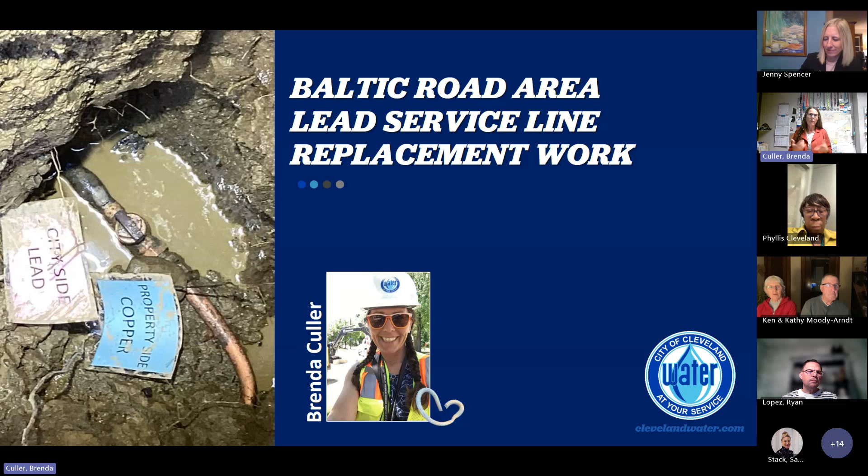Yes, fabulous. So, Baltic area lead service line replacement work: what you see on the screen here is what our contractors see when they're doing work in this street to identify service line material. I'll go through today's presentation kind of rapidly, but I'm open to any questions you might have at the end.

Cleveland Water meets all Safe Drinking Water Act requirements and has for more than 30 years. We just recently finished compliance sampling system-wide, and it shows our water remains well below the 15 parts per billion limit on lead.

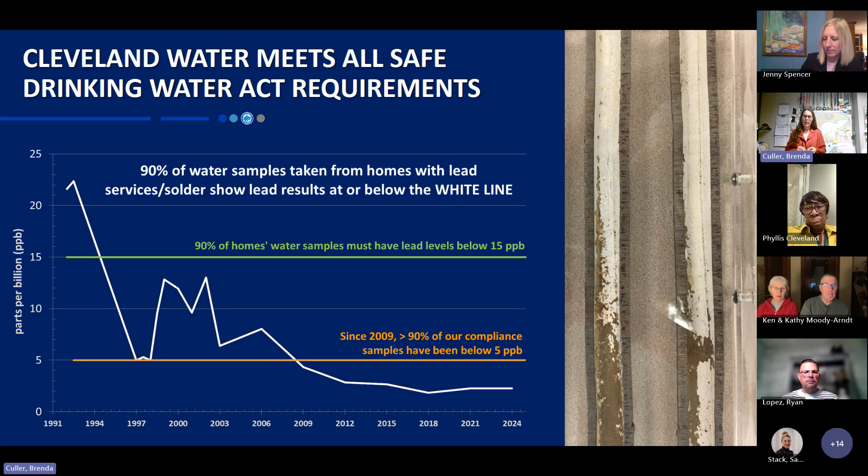So what we've been doing is Cleveland Water has been very proactive at trying to get bipartisan infrastructure legislation funding to take out lead service lines in communities that have the most lead service lines, such as the city of Cleveland. We started this work a couple years ago in terms of planning and obtaining the federal funding, which is a portion of loan and a portion of grant. We actually started replacement work in August of 2023.

In terms of service lines, we realized during the project that a lot of people are unfamiliar with water infrastructure. Water mains are below every single road in Cuyahoga County, and most of those water mains belong to the city of Cleveland Water. But a service line is what connects the water main beneath the street to your home.

The service line is divided into various types of material, and we are now required by federal law to investigate the material types, record this, and put it on public-facing maps. So the city-owned portion of the service line is marked A. We are investigating lead connections on your street because we think that is lead. The B portion is what comes into your house.

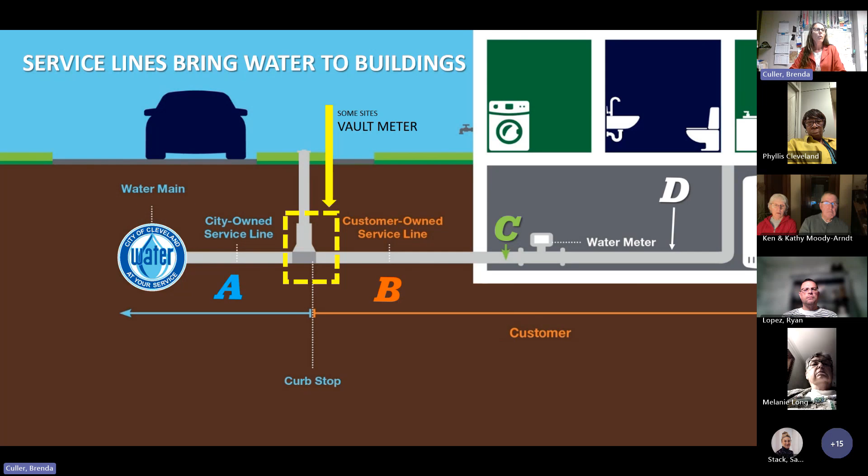You see this customer service line marked B when we do an investigation in the street, and C is what comes into your house before the water meter. Traditionally, about 99.9% of B and C are the same material, and most of that material is copper. Some customers do have a vault meter where the water meter is not in their house but vaults in the street. We address those individually, but in general, what we're trying to find is what's on either side of that curb stop connection so we can replace lead when it is found.

Where is the lead? These lead service lines could be on pre-1954 original water main installs, or on customers' homes that were built before 1954. Sometimes water mains were laid in the ground and connections on the city side were made many years, even decades, before the homes were constructed. That's why we don't always have similar material on either side of the connection.

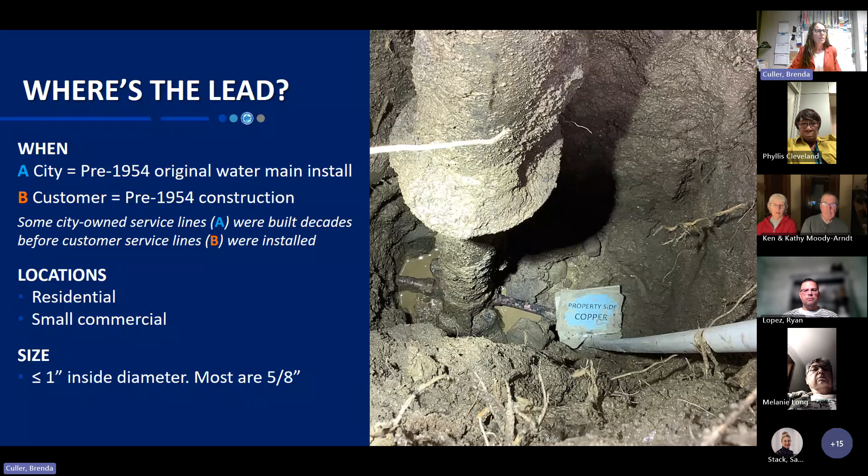Lead service lines were used primarily at residential connections and small commercial because the connection size is 1 inch or smaller. Cleveland has a lot of lead service lines, and we're working very hard to plan with city of Cleveland officials for their removal. Ward 15 in Cleveland, if it were its own city, would be in the top 20 communities that have the number of service lines.

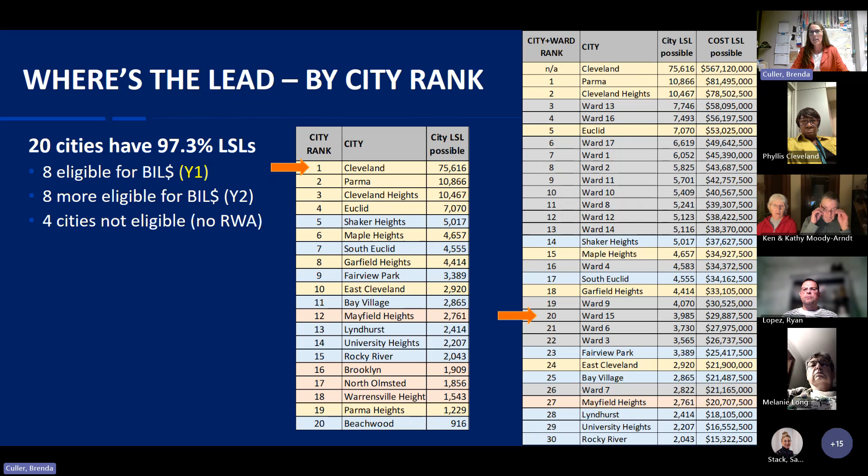So we're very excited that Councilwoman Spencer is supportive of our initiative to take out lead service lines in her ward. The map, which was on the flyer delivered to your home, is the one presented here on the screen. It outlines the lead service line replacement work area in red, with the water pollution control replacement work area marked by green dotted lines inside of that. In terms of the lead service line replacement work, there are approximately 125 connections in our work zone that could have lead on the city side.

Of those connections, about 80% of the investigations are complete and we know what the material is, and about 50% of the work to replace lead is complete at this time. It'll probably be another 3 to 4 weeks before our work is wrapped up in terms of taking out the lead service lines. Later this evening, water pollution control staff will go over their portion of the work.

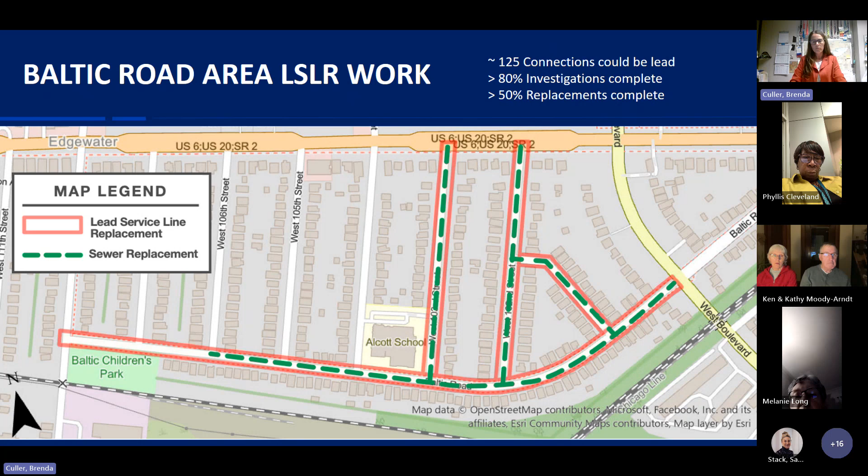In terms of materials you've seen or will see at your house, there are our welcome and outreach letters, which come after much planning and communication with you. If your lead service line has been removed, you've gotten a purple door notice like the one shown, with a check mark beside lead removed. You'll also get flushing instructions on how to remove and clean your aerators. These are part of our communications plan that our small lead team here at Cleveland Water will be implementing at every connection that is lead over the next 13 or so years.

These notices - if you have residents or friends who don't live in the Baltic area but could have a lead service line, they may have gotten a letter from Cleveland Water recently with a QR code inviting residents to scan it and report their service line material. This is something Cleveland Water needs and is encouraging residents to do. We have about 195,000 locations where we have to determine the material on the customer side, and that's presented on our new public facing map.

Because you're in the Baltic Road area, the work to replace your lead service lines overlapped with the mailing of this annual notice, so you may have received both pieces of literature in the mail. We apologize for any confusion.

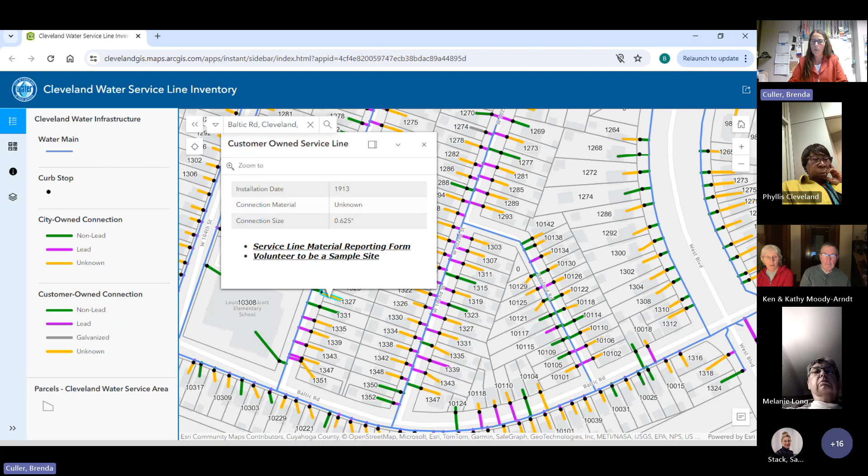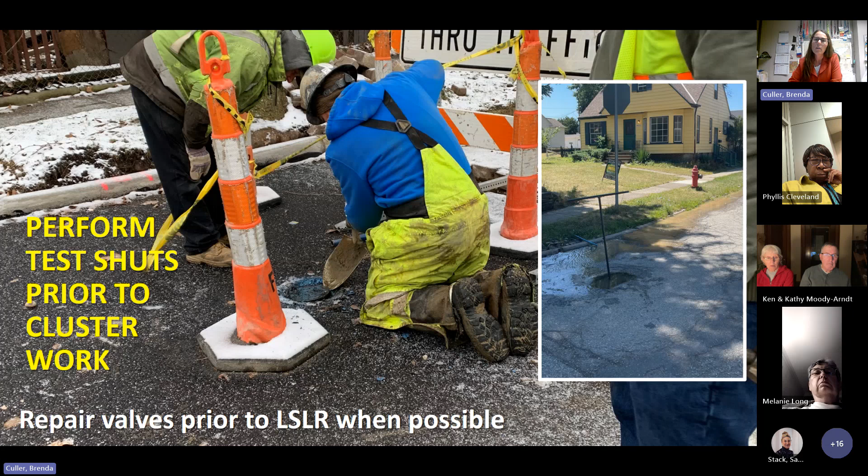The staff in this picture are the new lead service line field staff who were trained in August 2023, and many of these young new staffers are still on the job working. They're actually consultants, but we consider them part of the Cleveland Water family.

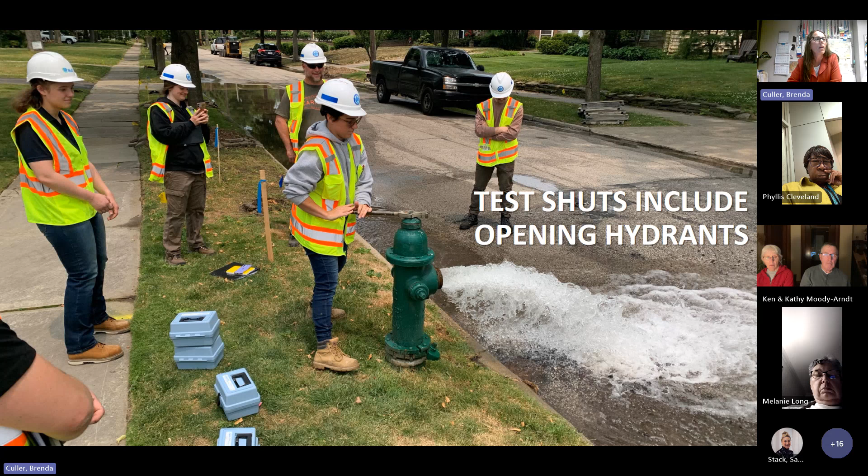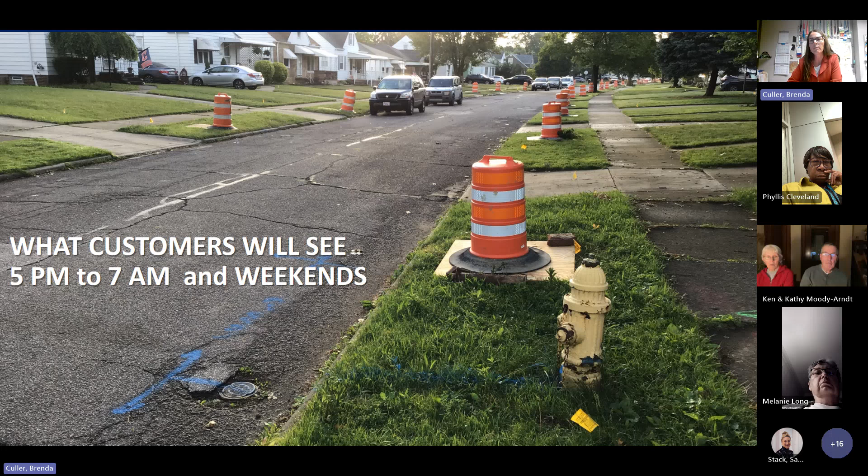What you'll see before and after construction hours, and on the weekends, is basically pieces of wood with orange barrels on top. These are the curb stop locations where the material will be investigated. Material is investigated with hydro excavation, which squirts water under pressure into the hole to remove the soil, and then a suction hose vacuums up the soil down to the depth of the service connection.

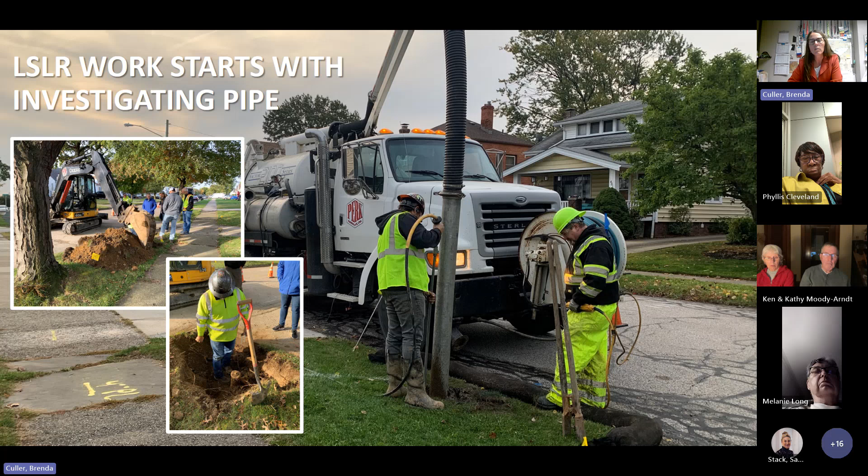The other way is using a backhoe to dig around the connection. If you have a concrete driveway where your curb stop is located, we do have to dig that up through the concrete - it takes a little longer.

What customers see during lead service line replacement depends on which contractor is assigned to the street. Terrace Construction is assigned to the Baltic Road neighborhood. The contractor on the screen is a different contractor, but there are lots of moving parts between dump trucks, backhoes, operators, and staff running around trying to get the job done efficiently.

Typical city-owned lead service line replacements have two excavations: one right adjacent to the curb above the water main - that's the one in the street - and one excavation in the tree lawn. These two connections will take out the city-owned lead. This is called a short side connection because it's closer to where the water main is. If you're on the opposite side of the street from the fire hydrants, you have a long side connection, but this same hole in the street will be used to replace your water service connection.

91% of customers in Cleveland have copper on the customer side, and we do not have to do work at your home. That pattern is pretty much holding true for the Baltic area neighborhood, where on Baltic Road itself, I think we only had 2 customers that had lead connections that needed replaced.

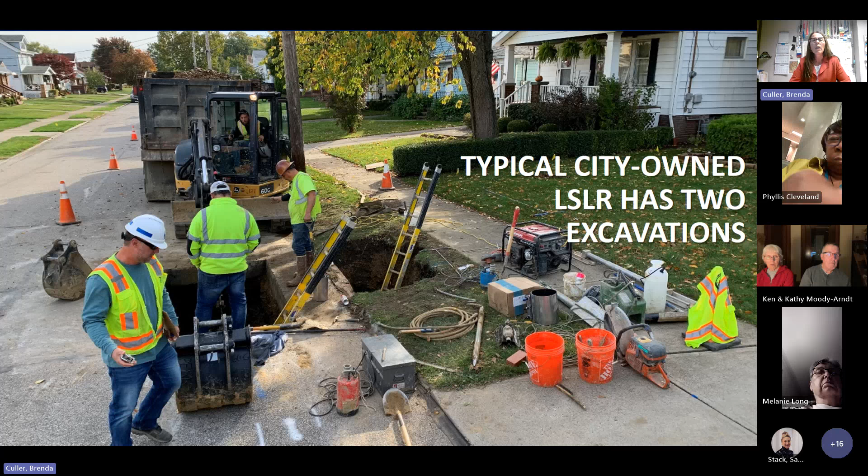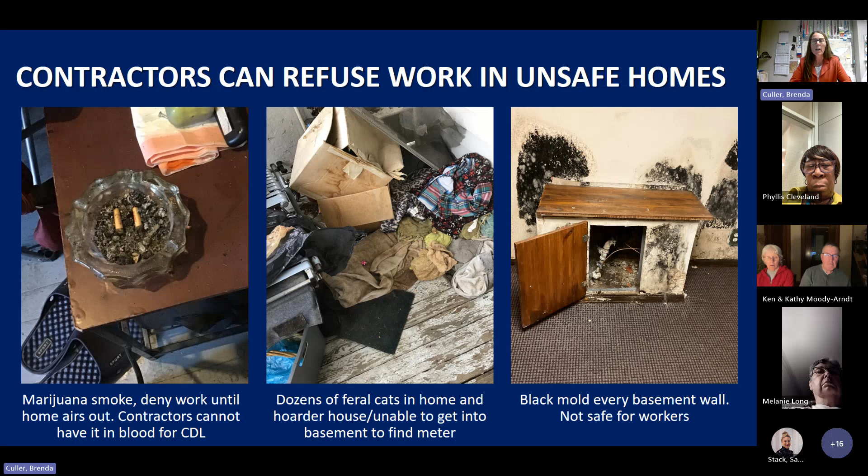As part of our program and as part of the federal requirement, customers who have galvanized steel downstream of a lead service line - we are also replacing those connections. Currently that's at no cost to Cleveland Water customers, and we hope to continue that pattern. If there is something in the customer's home that makes it unsafe for our contractors to do the work, we'll advise the customer of the thing that needs to be corrected, and then when they make that correction, we will replace the customer-owned lead service line at that time.

A question we often get is, how is this done and what's it going to look like? There are 3 different ways, and we always choose the least invasive way possible.

So one method is called moling. The drill bit on the left is used to cut about a 3.5-inch diameter hole right above the foundation wall. A mole is run through it out to the street, and then the copper connection is pulled from inside the house out to where the water main is at the curb stop, and that's connected.

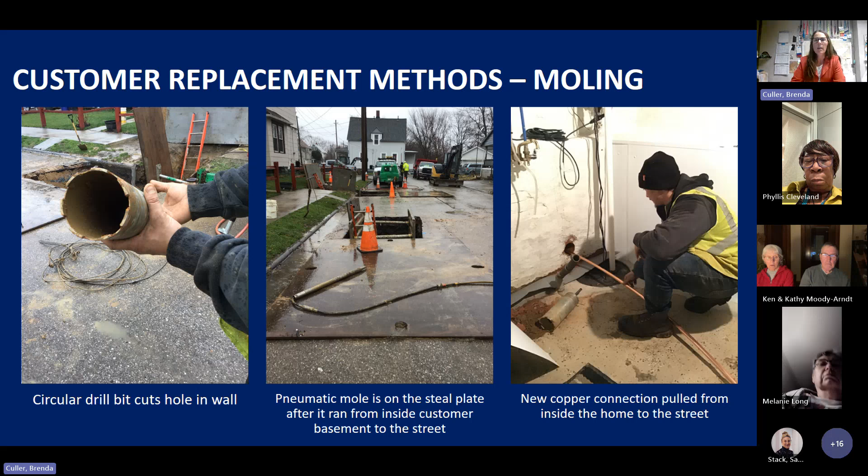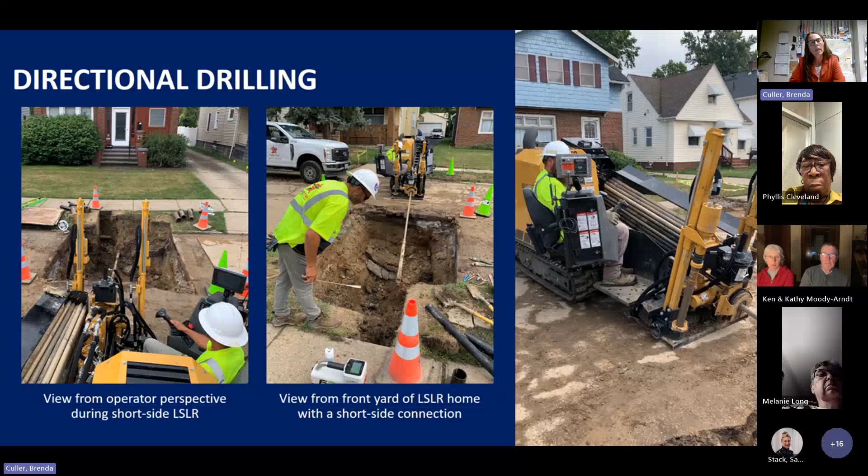Another method is called directional drilling. This method is not being used in your neighborhood, but some of your friends who live in Councilwoman Spencer's ward may experience this in coming years. This is a small machine that sits sideways across the road, and it literally drills a hole underground to run the new connection through. That drill bit will come up in the customer's basement. The advantage to this is sometimes if the water meter's not at the facing wall, we can go under the foundation and not have to move the meter.

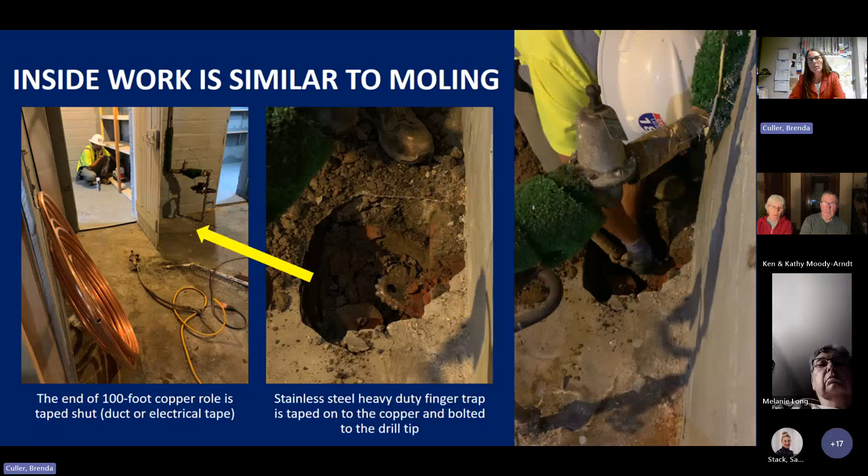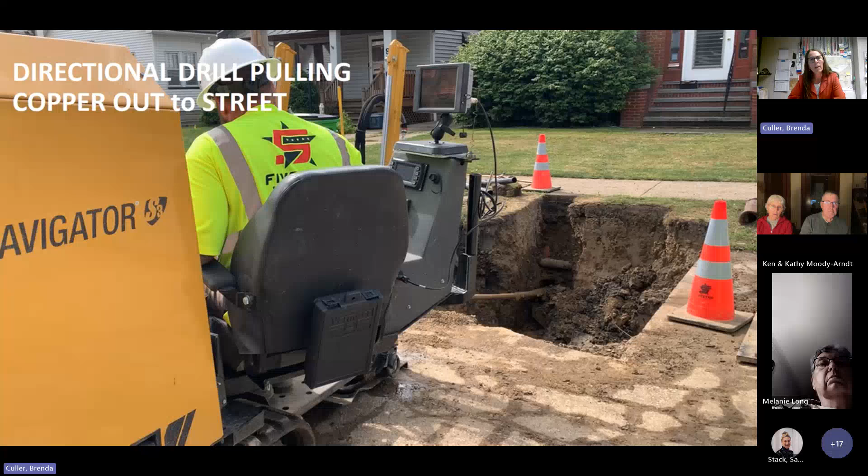But if we do have to move the meter, we will reconnect all the customer's plumbing, and that's work our contractors will do at no direct cost to the customers. This copper line is then pulled out through the ground, underneath the ground, without disturbing most of the tree lawn soil, as you can see in this video. That's the copper line being pulled through the ground. The copper is kept safe inside because the ends are taped shut.

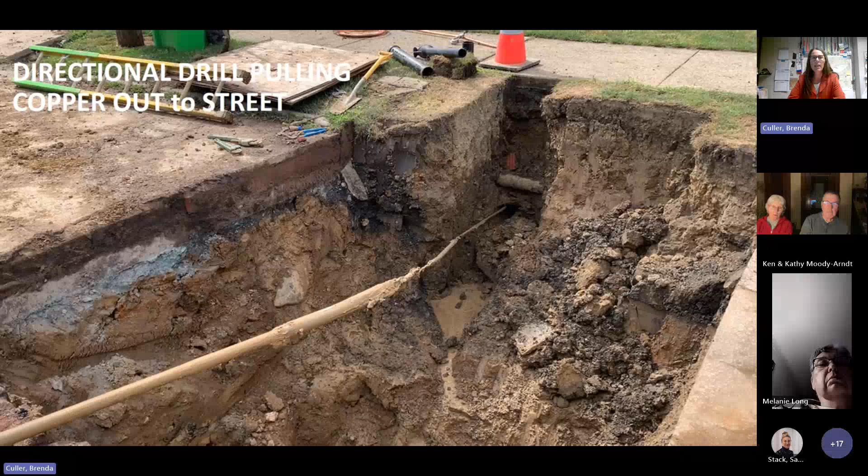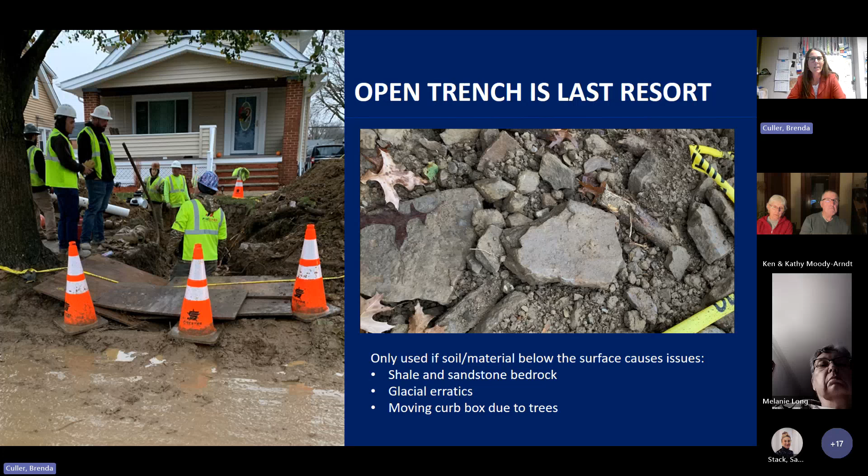The only time we have to open trench is if there's some type of underground obstruction that prevents us from doing the moling or the directional drilling. Most of the city of Cleveland has very good soil, and we can directionally drill or mole. Some other customers in other cities have shale, sandstone, and glacial erratics that make it very challenging.

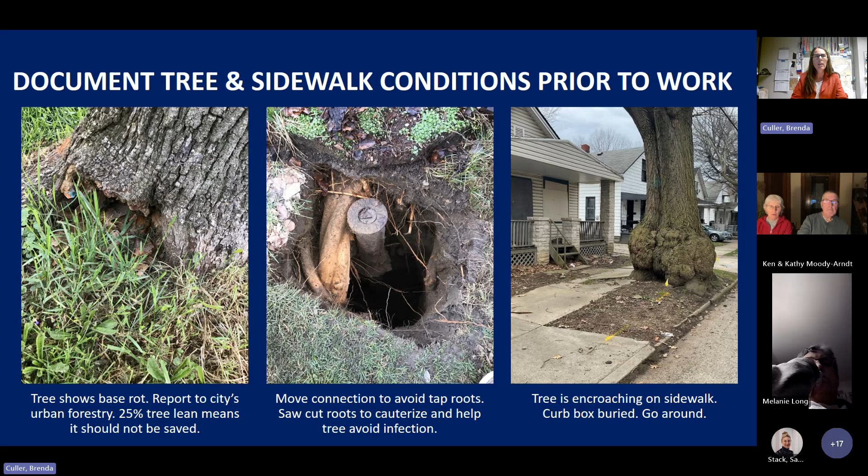If we do a hydro excavation and the curb stop shows lead, we're not going to replace the connection right by those tap roots. We'll reroute that connection on the city side. Sometimes we find interesting trees in tree lawns. If it was a tree lawn like this, we've not had to replace a connection with a root flare this big, but that would sure be an interesting challenge.

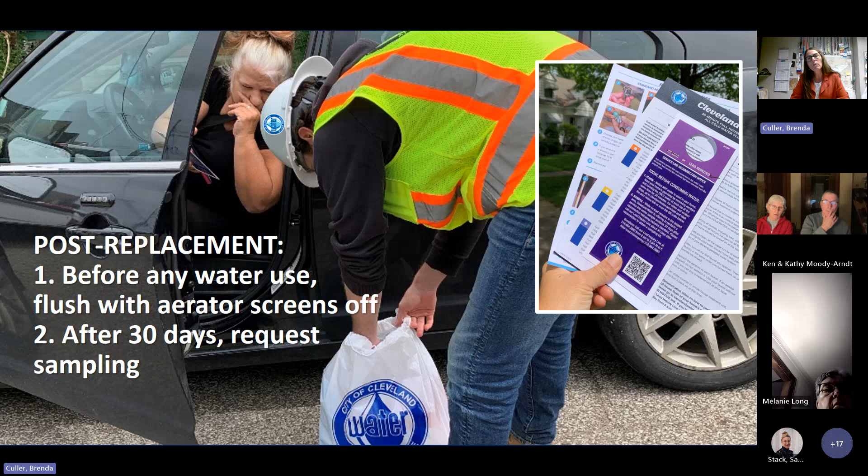After the lead service line replacement work is done, before any water use in the home, we encourage customers to flush their full house plumbing, following the instructions provided. After 30 days, you can call us and request a water sample kit be dropped off at your home. If for some reason we replace the city-owned connection at the same time as the customer-owned connection, we're going to leave you a water filter that's certified to remove lead, as well as instructions on how to use it and answer any questions you may have.

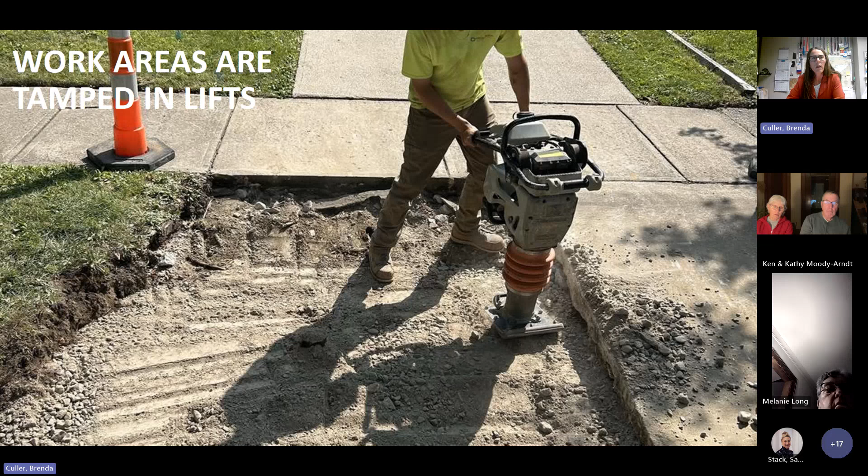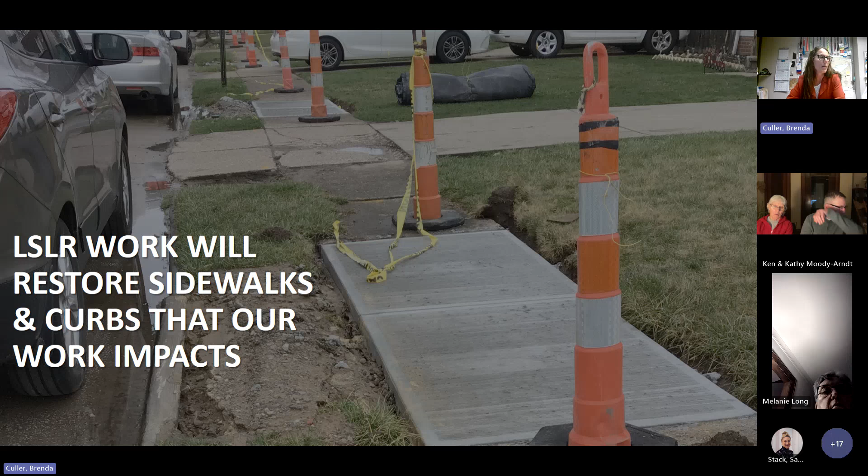We also do the restoration of surface areas. Work areas have sand bedded around our infrastructure, and then they're tamped in lifts, which helps improve settling speed. Our contractors will also come back and restore any sidewalks and curbs that our work impacts. As you can see in this photo, areas that our work impacts got brand new concrete because we had to take out the concrete sidewalks there. Areas our work doesn't touch, we will not be replacing that infrastructure.

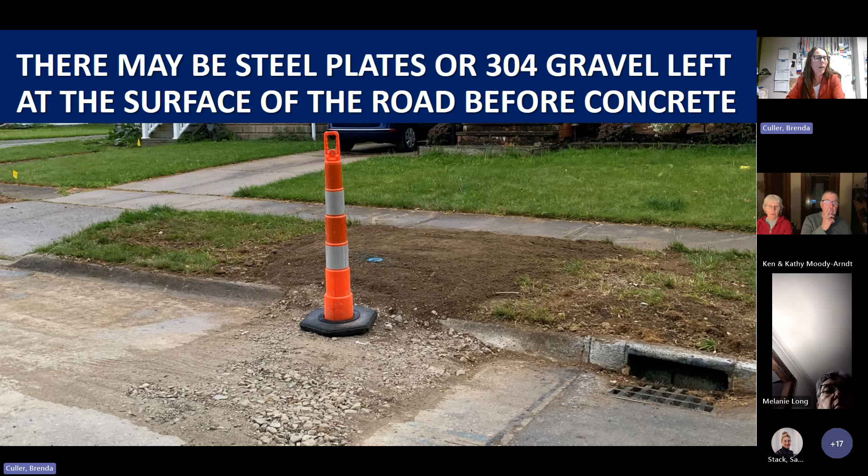For the Baltic Road project, because water pollution control work will be done after ours, we're not doing the asphalt at the surface. We will be leaving concrete at the surface. In some other instances, prior to the concrete being laid, there might be gravel, called 304 gravel, at the surface, until the contractor comes back and pours the concrete. The concrete patches will look similar to the photo you see now until the asphalt is laid, but WPC's work will also be part of that process. I apologize, I don't have a photo of what that looks like.

We have done some partnership projects with WPC in the past 12 months. Finally, grass seed restoration.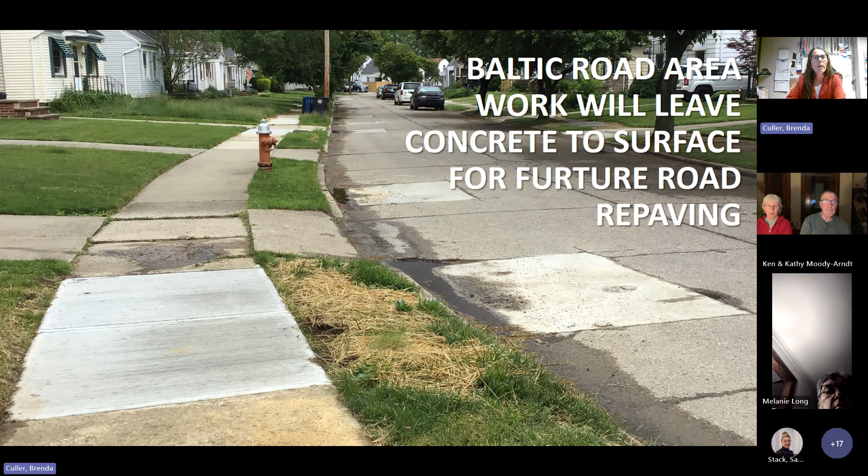Because we are entering the traditional colder months of the year, our contractors may plant grass seed, which may or may not grow depending on November. Current soil temperatures are still warm enough to allow grass seed to sprout and germinate, so we are still attempting to plant grass seeds.

We want you to know we'll check back on those streets in the spring and make sure everything that needs restored is restored. If you as a customer see settling of an unusual nature, we encourage you to send us photos if you are able, or just call us and let us know. There's two types of settling. The picture in the middle of your screen shows a level settling where it's just a depression. We do send contractors back to level that off. This is not an emergency type of event, not a trip or fall hazard, and someone's not going to get injured if they accidentally step in that. It's just one of the things we will restore.

The photo on the right, I would consider this a trip hazard or a fall hazard, where we would tell the contractors to go back that day, if at all possible, or within 24 hours, to fill in that hole, because someone could trip, fall, and injure themselves on it.

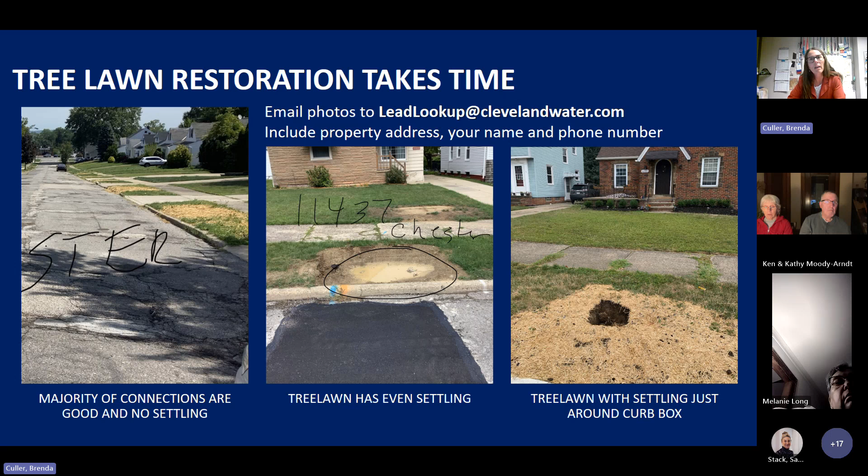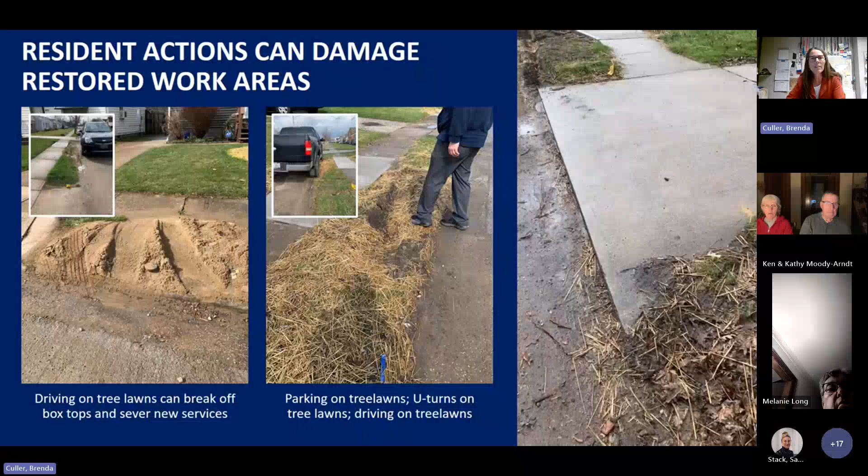If you send photos in, we try to check those every business day. We include your name and phone number so we can reach back out to you and let you know it's being addressed. We also want to encourage customers not to drive on tree lawns or cause damage once we restore the tree lawn, because our staff is limited in what we can do, and we want to make sure the infrastructure we put in place remains there. Also, if you have trash cans and recycle bins, don't put those on the newly restored tree lawn area, because that can impact the grass seed germination.